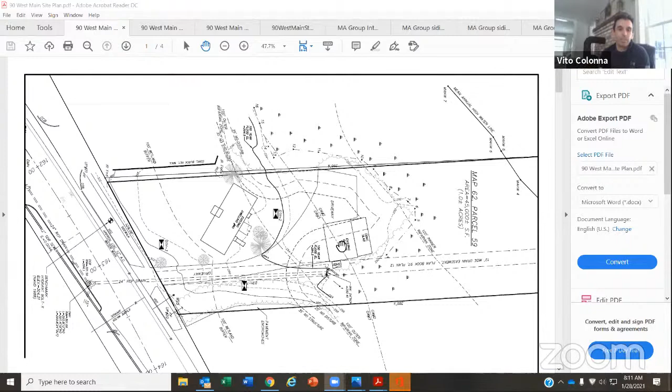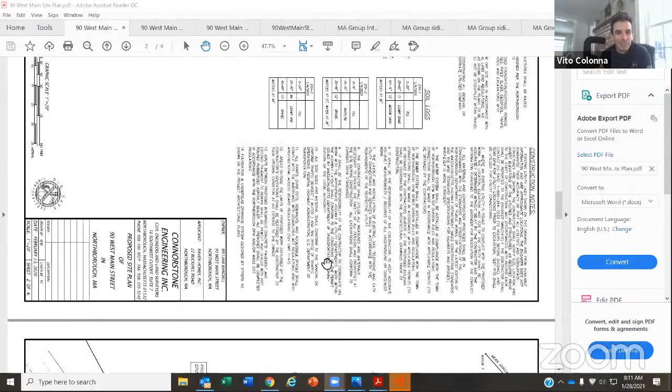So the proposed design, if we go to the next sheet, we're basically going to demo everything on site. Wrong building, there we go. Oh, that was actually the old one, if you remember that one, that was when we were here last time. Oh, Vito, I'm sorry, did you send me? Oh, you okay? I can, if I can jump on my computer here. Wait a minute, I can find it too.

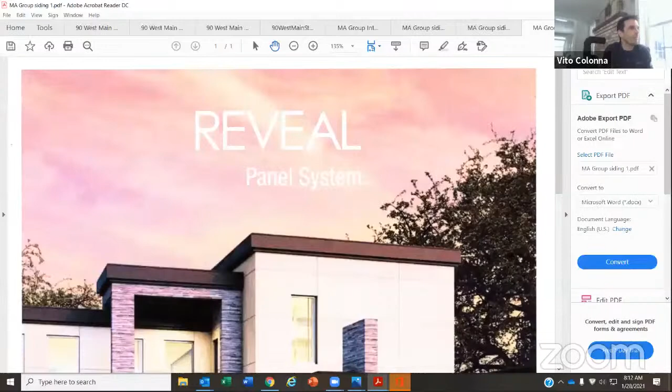Tom, I've got all the photographs, let me... okay, I got it. So I could just send them over. Nope, that's... oh God. I can email these. If I email them to you right now, will you get them? Yeah, okay. It's just taken a second. I found it, Vito. Oh okay. I just sent them over again, just in case.

Okay, so just bear with me, folks, while it's opening up. Oh yep, that's the email right there. Yeah, okay, so there you go. So you want... yeah, the next one. Just scroll down to the next page. That one? Yep, that one's fine too.

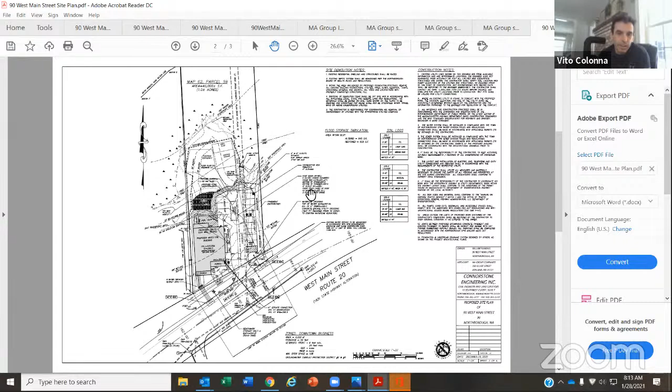You go up one. That's the landscape plan, but that pretty much shows the same information. So as you can see, we're proposing a building on the left side with parking on the right-hand side. We've got a commercial business use on that first floor and then residential above on the second floor.

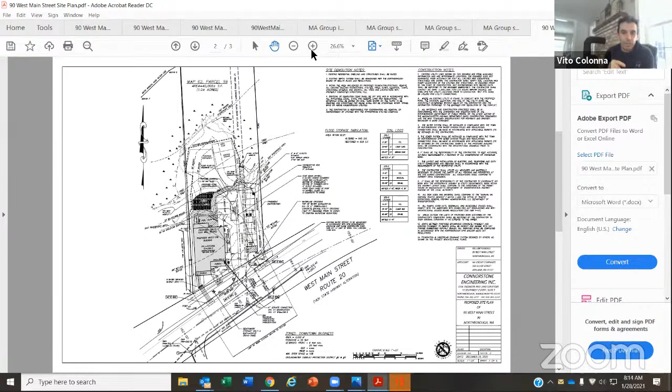Tom can go through the architecturals and the layout of the uses inside. But we've got parking on the side of the building, all the spaces are to the rear or to the side. There's nothing in front of the building. We've provided curb radii in the front to fit fire truck access into the site. We've also provided on the inside a turnaround area kind of right behind the building. It's a combination loading zone, turning area, and we've also put the dumpster pad back there, so smaller emergency vehicles and delivery vehicles have a place to turn around without backing out onto the street. I know that was kind of a concern last time.

And the building location itself, we're kind of limited on the site just because of the floodplain. There's a dark bold line on there that represents the floodplain, and it kind of cuts the site in half. So the building really has to come up to the front of the site. We're kind of limited on where we can locate that, which I think is good too, because I think the town prefers that close-to-the-street setting of the building. We're within that setback that's allowed, the minimum and maximum — we fall right in that zone. So no variances or anything needed for the building location.

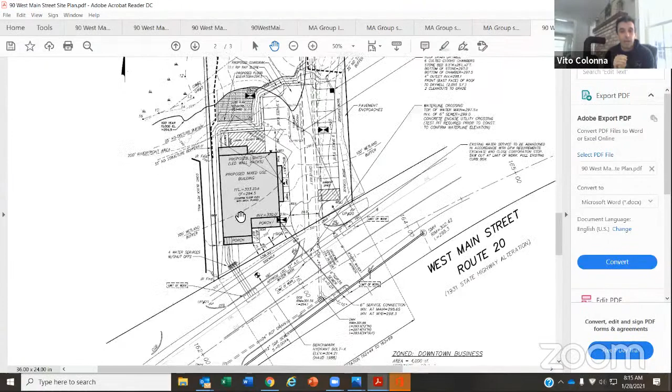I think that kind of sums up the site plan as far as design review of the location and what we have for spaces. All the spaces comply, we have the requisite amounts, and we were able to fit all those on there. We have our handicap spaces and access to the building. So it's pretty much a straightforward site plan itself.

I think you probably... and then here's the landscape plan. The applicants selected some landscaping, and we overlaid that onto our plans. Basically, they have some perimeter side buffer plantings — I think those are pine — on the front of the building. There's two porches and a sign up front, so there's some landscaping along the front of the porches and around that sign right near the front.

I think that's good from my end. I don't know if you want to have Tom go right into the architecture, or if you guys want to have questions on the site plan. Why don't we have any of the board members who have questions about what you just presented ask you, and then we can move forward to Tom. Okay, sounds good, does that work?

Okay, yep, so Dave, Lisa, and Diana, do you have any questions for this presentation that was just presented, this part of the presentation? Yep, I do. Okay. Can you hear me? Yep.

On the plans it says that there's going to be one bedroom and two bedrooms, but in the email it said two three-bedrooms. Is it a two-bedroom or a three-bedroom on that other apartment? I am not sure, Tom could probably weigh in on that. Well, I thought we were going to focus on the site plan right now. I'll deal with the building later.

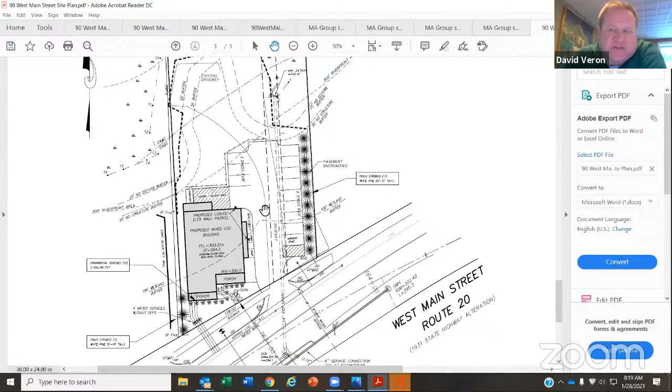My other additional landscaping comment would be, I'd like to see an actual legend on this, as well as, are they going to put beds around this, or are we just putting the plants in with no beds around it? What's your game plan on that?

I'm not sure, I would assume on the right-hand side that would be a bed, and then the front. So we can delineate the limits of the beds and stuff on the plans also.

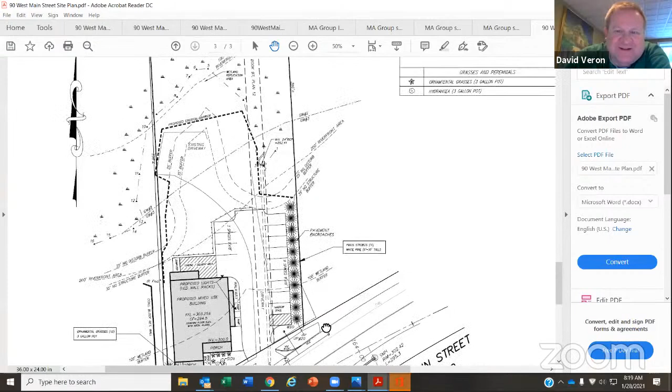Dave, there's a legend in the upper right-hand corner. It's not showing on screen, it's just cut off. It's in the email, if you want to look at the whole sheet. Yep, okay, I see that.

Yeah, so I'd definitely say just delineate the beds, what you're planning on doing in there. Okay.

I don't have any comments on the site plan, it's nice to see a site plan that has all the things we're always looking for, like the sign, the wall pack, and the dumpster location and that kind of thing. So it seems to me that it's in good shape.

I kind of tipped them off a little bit. Really? Okay, well, but they always do nice drawings too.

Do we have, so just as long as the applicant knows, I wanted to add that it's 8:20 and we have a hard stop at 9 in order to have a quorum for this meeting. So we'll move along the best we can, but just for the applicant to know how the meetings work, we typically have two or three meetings with design review. So this could be a session where you take a lot of feedback and then come and finalize your stuff for the next meeting. Okay.

So did anyone have any other comments left for the last presenter? And then we could move on to Tom next, who would move into the interior of the building.

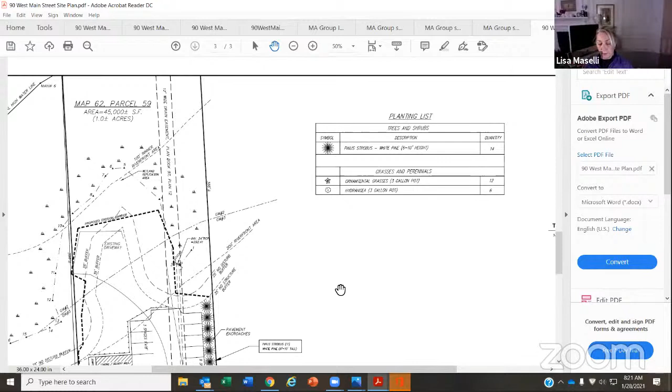Is there any way we can show a street view with the landscape elevation, with the building on both sides, showing how this actually sits between the other two buildings it sits between? I think there's a street view elevation of the building itself, but it doesn't include the two on the sides. I think it would be hard for us to start requiring people to show elevations of the other buildings. I don't think so, I think a street view with a camera from Google works pretty well.

We're in the technology world. I don't think that's asking too much. Well, it just depends on the view that you get.

Yeah, I know the building on the right-hand side, on the right screen side, that one's very close to the road also. Their parking area kind of shares our property line, and their building is very close to the property line, up to the right of way. So Vito, you had a prior site plan that showed the location of 96 and 82.

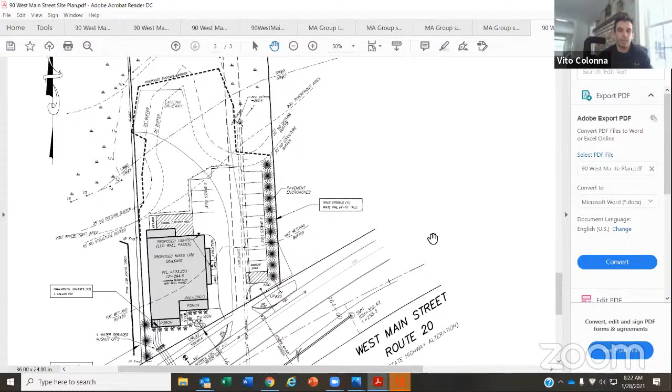Do you have access to that? Yeah, we can show the locations on the site plan itself, just so you get an idea of where those buildings lie. We do have those in our files.

All right, well, you can bring it the next time. It doesn't have to be right now.

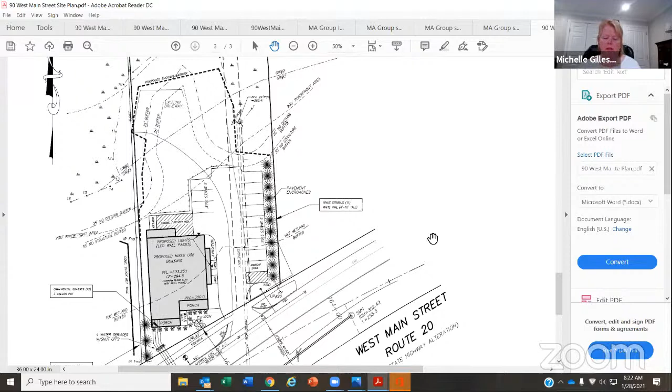You could leave the site plan on for a minute. So as we referred to, this is 90 West Main. To the left on the screen is 96, which is Renovo, a yellow cape looking building. To the right is Apex Dentistry, number 82. They're both within 10 feet of the property line, and they're both gabled to the road, so they're kind of a classical vernacular architecture.

That's one of the reasons the building we're proposing is also close to the street and also has some elements of that classical vernacular gable to the road. As Vito pointed out, because of the restrictions due to groundwater 2 and 3 and wetlands and all the buffers, we need to move the building forward. So it does conform in terms of setbacks, use, and building height. The allowable uses in downtown business includes vertical mixed use. We're going to have business on the first floor, which would be MA Group Construction Company, and the upper 2 floors are 3 apartments, 2 3-bedroom apartments and 1 2-bedroom apartment.

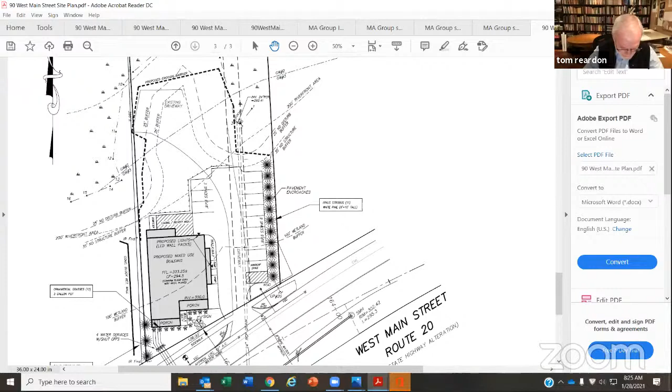So this color scheme is what we're proposing. We're going to use black or dark gray roof, black windows, white siding, columns, trim, etc. The architecture is based on a lot of the themes we see in Northborough, especially on Main Street, Summer, School Street, where we have this classical vernacular. It's residential in feel, but this building is mixed use, so we have some commercial detailing on the first floor in terms of the siding and window style, but it's meant to fit in with the predominant styles of Northborough.

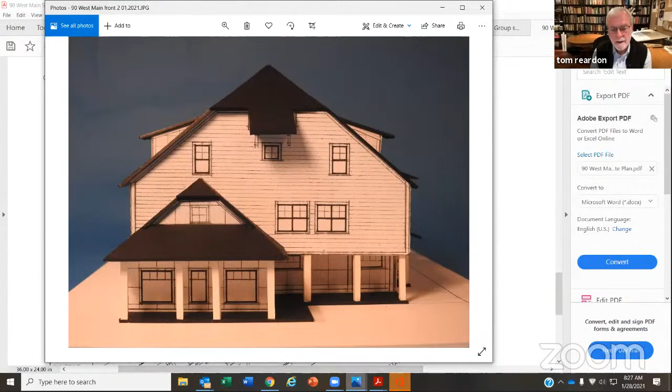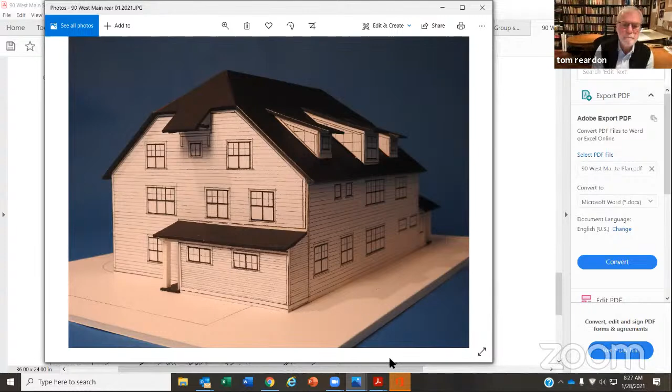So with that, I'm certainly open to answer any of your questions. If you want to go through, you can see the rest of the exterior views. Okay, that's straight on front. This is facing Main Street, and that's the west elevation facing 96 West Main. This is the rear, so that lower bump out is the access to the basement. And that's the east-facing elevation towards the parking lot.

So here you can see we're probably going to use 3 different kinds of siding. There is a product made by James Hardie, a cement board siding. The middle section is what they call the reveal panel system, and on either side there'd be lap siding or beveled, and possibly some what they call beaded cedar mill. I think I also included some cut sheets on the siding and the windows.

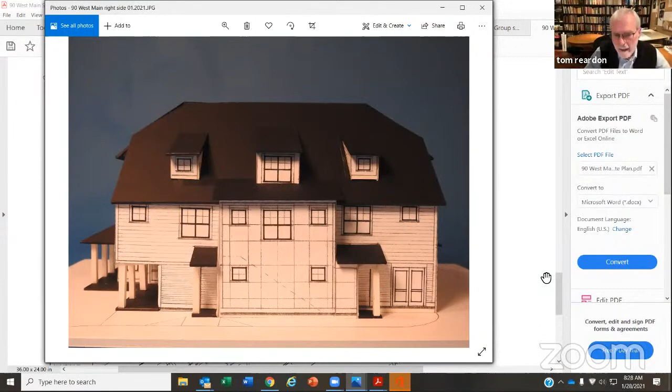So this is a Marvin Integrity, all fiberglass window in black. The fiberglass holds the color very well, not like a painted vinyl, which will fade. The double hung - we're showing a 4/1 pattern, which is common to this classical vernacular.

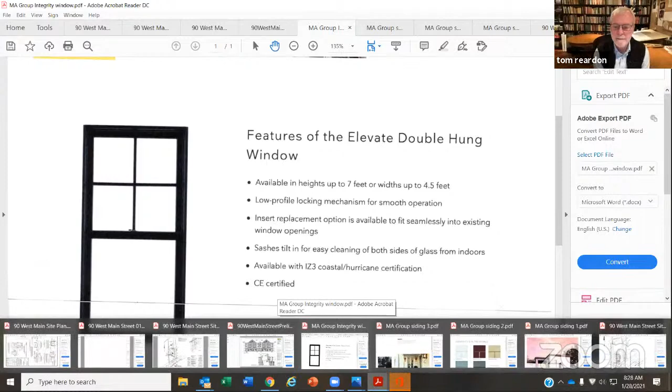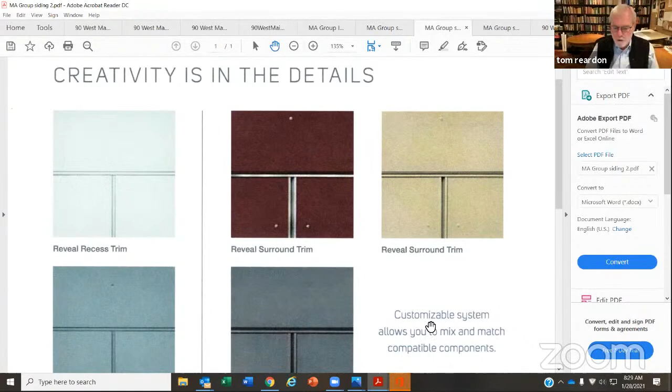So this is a cement board siding, composite siding by Hardie. That comes in various widths - we'll probably use 4-inch exposure in some areas and an 8-inch exposure. And if we go to the reveal, it's like a smooth flush panel. This allows us to distinguish some of the more commercial portions of the building, and also lets us make the building more of a contemporary interpretation of traditional architecture.

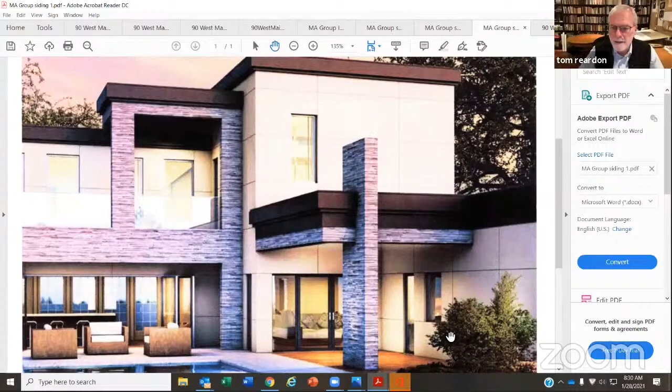And all the siding we're proposing would be in white. Now, are you flexible on the all white? Could you go into a light gray or something that's just a little bit less contrasty? No, the contrast is one of the things we want to emphasize, to make it distinguish and stand out along Main Street. A lot of the Main Street buildings are yellows and creams and tans, and we wanted to make sure that they had the visibility for their business, which are their contractors. So we strongly like to stick with the high contrast. Like if you go to a town like South Natick, where all the buildings are white with black shutters and black windows, I think it's a very attractive traditional look.

So I first have to say, it's refreshing to see a building that doesn't have a lot of vinyl on the outside. I like the material selection a lot. No vinyl, no shutters. I appreciate that from a sustainability point of view.

I think the scale, the way you have this sort of smaller scale entry towards the street, makes a lot of sense. And I think also the way that scale is used on the various types of siding is very effective.

Let's look at the pictures for a second. I don't have any issues with the elevation. I think the roof is really elegant. We don't see a lot of roofs that have any detailing like this. So I really don't have any objections.

I think black and white makes a lot of sense. Particularly with the black window frames and mullions, I think the white is a good solution.

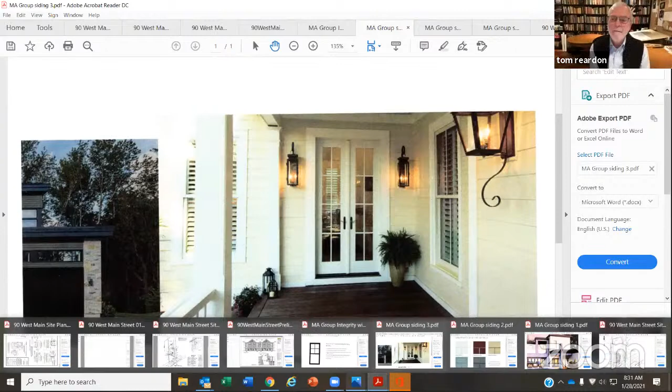Can you tell us a little bit more? Are the columns just square and the same profile all the way up, correct? Right, I was looking to make the support beams and the columns probably the same thickness, so it would read as one system. That, coupled with the flat panel, gives me an opportunity to lend a more contemporary feel to this classical language.

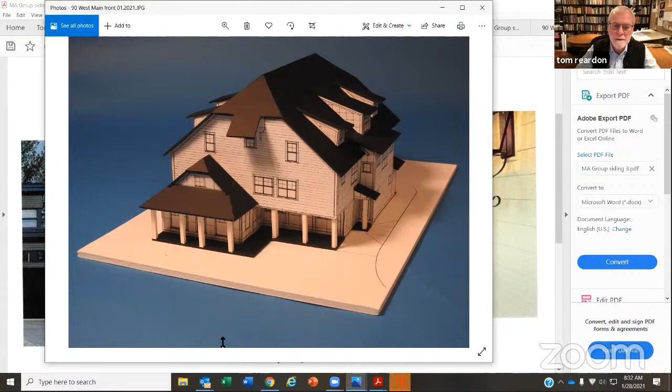So the farmhouse look, or the I-house look, was based on the Greek temple, Greek revival look, but it was kind of the poor man's version. This is my contribution to that tradition, but also using some classical details. I'm not trying to replicate a historic style, but I'm trying to work within the historic styles that are prevalent in Northborough. I think it's an accurate interpretation.

Nice design, Tom. It really looks good. Thank you. Any feedback from Dave? I think it looks great.

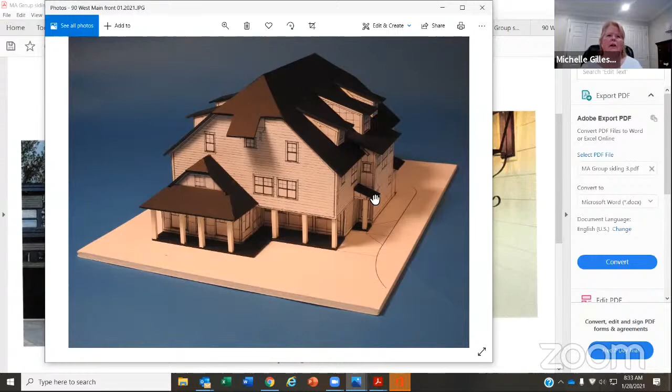If anybody wants to see the Google Street View, I have it up. Let's just take that off. I'll stop sharing. Okay, Diane. Oops, that didn't work. Hang on. Can you see that now? No, Kathy, I may have to... oh, there we go. Is that working? Okay, so this is the site.

And then you can see the yellow over there, that's the dental facility that Tom referenced. And again you have yellow over there. So I think the colonnade is kind of a nice nod to that, Tom, as well. I have to take credit for that building as well, so. Oh, well, there you go.

The question about the commercial building underneath, is it just going to be a showroom, or what are they actually going to do there? Well, they're a construction company and they have their offices. They will have a showroom for displaying kitchens, bathrooms, etc. Do they have storage in the back for their materials, or is it just going to be a showroom? Mostly showroom on the main floor. They might have some material stored in the basement. They're not storing any materials on the exterior.

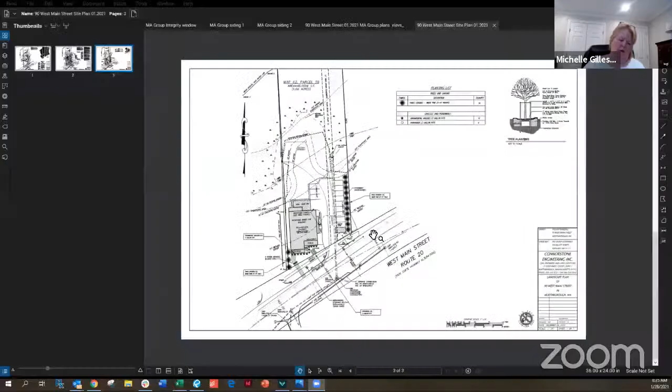After you do that, you're going to address how many bedrooms it is, because one of the members asked, was it 2, 3, 1 bedroom? Yeah, 2 three-bedroom apartments and 1 two-bedroom apartment. Okay, so that's different than what's on the sheet. Well, I don't know what sheet you have, but that's what would be proposed. Okay, yeah, we could update that. That was for the parking count, so we'll just update our site plan.

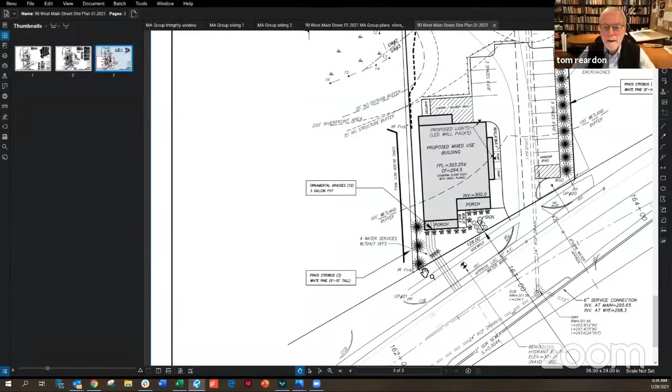So if we look at this lower left corner where the retaining wall is, you see three pines. Now there's a parallel line, one that goes through the three pines, and then about 5 feet to the left of that is another line. See that little wedge of property? Yes, right there. We don't know who owns that.

Talking with Vito, he says we cannot fill that because we don't own that property. I've talked to the owner of 96, Tony Abu. We would prefer to be able to infill so we don't have this gully between sites. Tony Abu has accepted our proposal to infill to level out the front of the sites. However, we have this obstacle with an unknown owner of a non-usable piece of property we cannot touch.

So I've talked to Kathy and Julie, the town assessor. We might have to do some research to see if we can find out if there is any known owner, and how we can resolve this issue of this little vestige, probably a drafting error from decades ago. But there it is - our preference would be to fill that.

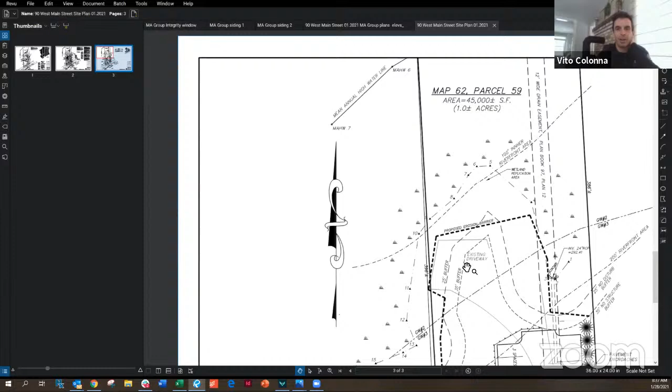How far back does it go? Does it just go between both? It disappears, it goes to nothing. Yeah, it's just a long triangular sliver, kind of a remnant piece. It happens - you need a title search to figure out who has rights to it. It could be no one anymore, you could be able to claim it, but as of right now, more research would have to be done.

So if we can resolve that, our intention would be to infill, so you don't have a retaining wall, and then it drops down and then goes back up again, which is less than ideal.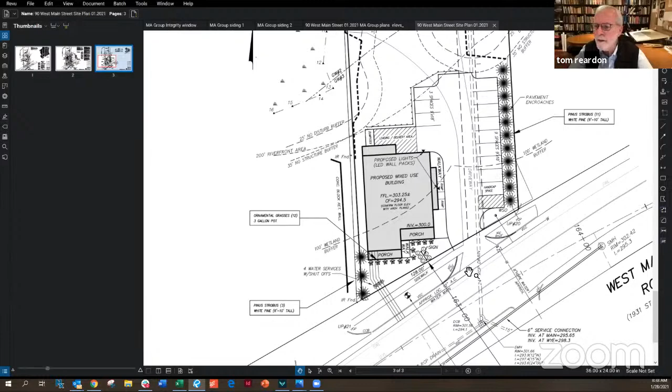And is the building itself a little bit below grade? So is the land going to be raised in that area, or are you just going to terrace it? Yes, we're going to bring the grade up to 303, which is approximate to a little bit higher than the roadway. We're basically going to fill it up to the roadway elevation, so when you come in the driveway, it's essentially going to be flat and then have a slight downhill after - so essentially at road grade.

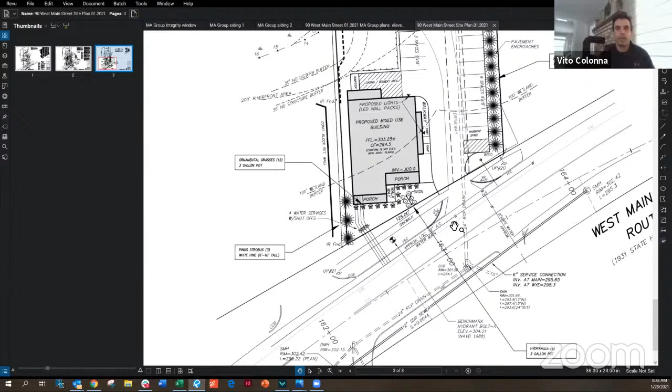We're going to fill that whole front piece in, and it'll go through the parking lot to the back. The back corner of the parking lot will only be maybe a foot or two below road grade, maybe 2 feet even in the very back corner. So we're kind of making a pad right off the road. Do we have the grades here? Yeah, so you can see in the back off the edge of the parking area, there's those contour lines - it kind of comes in, and then off the back edge it's going to drop down.

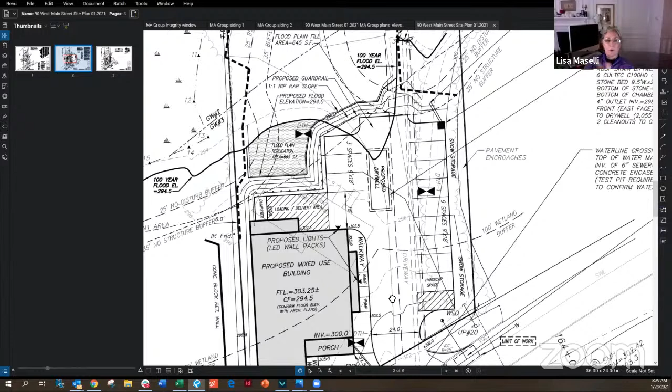All right, and that'll just be grass terraced - you don't have to worry about building any retention or anything there. No, we didn't have any walls proposed, it's all just grass slopes. And then we've also had a little area ramped down so you can access the back with a lawnmower or whatever you need to get down there.

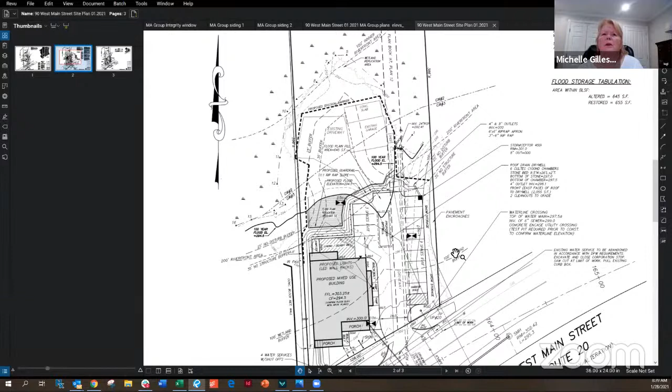I think that grass area in the back is appropriate because you have mixed use - you have apartments, you have people living there, they're going to be outside, and rather than just pavement, you got to provide some area for them to sit and be outside. And when you're back there in that low area, it's actually really quiet and nice - the elevation blocks the road, it's pretty nice back there.

And when you see back there where it says existing garage, are you going to put a new garage back there? No, that would just get cleaned up - so that whole back area won't have a garage on the property. So if there's no garage and you want to do maintenance, I would think you'd at least want to consider something oversized, like a shed, so you could put lawn mowers or things like that - I'm sure you don't want those inside the building.

Something for consideration - I think I would agree to something like a nice shed in the back. They're going to bring a contractor to do that work - most likely you'd have a landscape contractor come in and mow it, but we can ask them if they'd want a small storage shed or something like that in the back. I think sometimes in these mixed use buildings, it's nice to put a shed where storage is going to be for your tenants, or they could put bicycles out there - it's a nice amenity to offer.

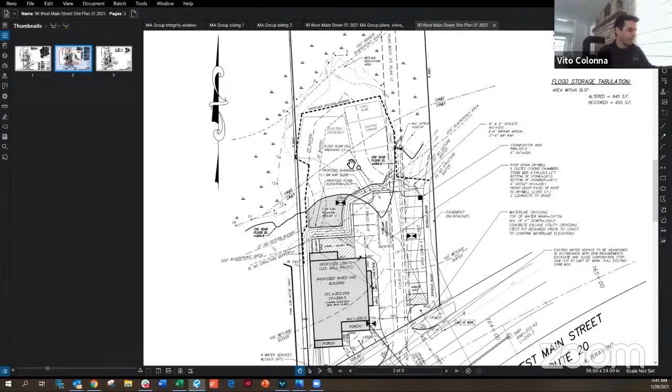And it's a shed. Okay, it's not something we have to be concerned about. It's a shed. They do have a full unfinished basement too, right?

Yeah, a lot of times in these mixed use buildings, there's 2,800 square feet in the basement. Tom, were they planning on breaking off to make little storage areas in the basement for the tenants? We have not discussed that. Primary use was to have mechanical, a sprinkler room. Yeah, the building has to have sprinklers.

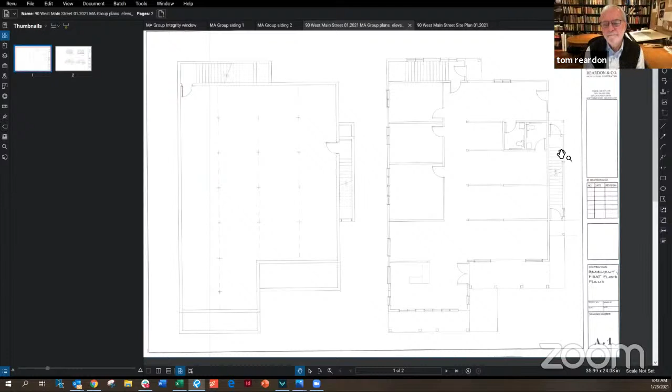Okay, looks good. All right, so...

Dave, do you have any feedback, because we're coming up to almost 8:45, we have a hard stop at 9, so let's give some feedback to the applicant for their next meeting. Dave, thinking about the left side corner of the building where they talked about that strip of land they have to figure out, do you have any feedback you can give them now to go work on their landscape there?

When you're talking left side, we're talking the void? Yeah, with the 3 trees in the front. Instead of doing the 3 trees, are you recommending to do evergreens? Well, they have evergreens in there now. Okay, I think that's fine. I mean, they have the wall right there, so it's kind of hiding the wall. So I think that's fine.

Do you have any other feedback on landscape for them? No, I think it's pretty good. It was just, if they're gonna do a bed in there, just show a bed, and that was pretty much it. Like mulch, just draw the line in and call it a day.

Okay, and you're okay with their plant materials? Yeah, it's a tight area. If they want to do something other than white pines, to Lisa's suggestion, that's fine. It doesn't really matter, it's a tight area there, so it's really up to what they want to do. The pines will get large there. It depends what type of pine they pick, but it's personal preference on what they want to do there long term, because it can have problems whether it be an arborvitae, a pine, or even a hemlock.

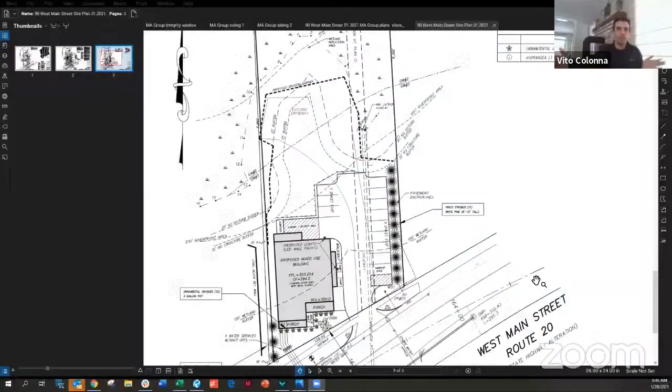Okay, so could I ask the question? Dave, if there's snow storage along this edge between the 2 properties, maybe just have some planting near the street and at the far edge? Yeah, I don't know how many trees are compatible with snow storage. That's kind of what I was thinking to ask, is if we clustered them up near the front and left the back as a buffer, as a plowing area, because it's about a 10-foot strip in between.

You could do that, or go with maybe some deciduous and then go with some grasses in there. Because the other thing is, like, if I was plowing it, I would go for a straight down shot right towards the grass area, right down.

That's where I would be pushing the snow, because you can have cars parked right there during the snowstorm. Yeah, and that's where I'm pushing.

I would probably prefer to see some deciduous trees in there with grasses, so in the winter the grasses wouldn't be there and you can push over those. That may be a better situation than evergreens, because evergreens are going to be an issue if you're trying to screen there. It's an easier situation for snow, since the cars are gone during the day and you can push in there, over where grasses like miscanthus were, which in the winter wouldn't be a factor. That would be a good solution.

So the property on the right, the paved area goes right up to the property line. It actually currently goes over onto this site, so it would be nice to get some relief between the two paved areas.

When I was looking at it, it felt like there were too many trees. When they mature, I don't want them growing into each other and killing each other. So do you need that many trees? Yeah, you can definitely lighten the load. Whatever goes in there is going to need a lot of maintenance.

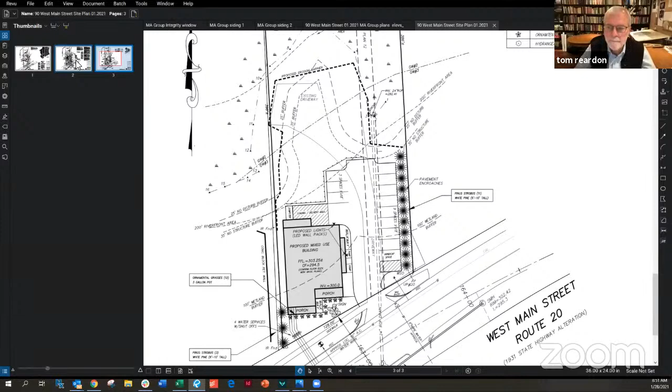On the two front porches along West Main Street, we'll probably have recessed lighting in the ceiling, so it would shine down, not out. We also have a couple of wall packs on the building directed to illuminate the entries and the parking lot. No poles are proposed. We need a photometric plan showing the light isn't leaving the perimeter of the building, but with the modest amount of lighting we're proposing, I don't think it'll be an issue. I just wanted to bring that up to see if you had any comments.

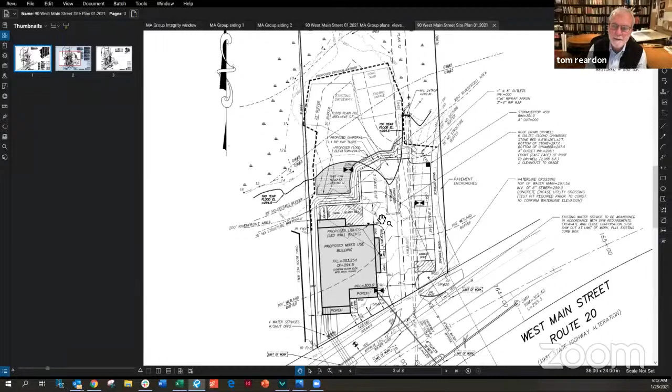I think the recessed lighting on the porch is an attractive look. It was done on the Brigham Street development, and there's another property on Main Street that uses it as well. I like it a lot.

Does anyone else have feedback on the lighting? They're going to do a photometrics plan anyway for the planning board, but they might as well get your feedback now so they can address it. I think that should go before the appropriate board. The ZBA? Oh, the ZBA, okay.

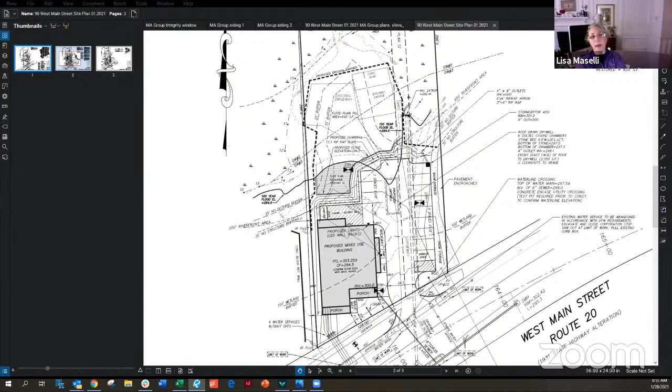My only other question is if we could put a couple of trees in the back of that grassy area, just to break it up between that and the water behind. It would provide some shade, and people are going to want some shade, not just grass.

Is anyone going to see them? Yeah, the people who live there. The wetland itself is like a wooded swamp, so there's a bunch of mature trees back there. On the left-hand side, behind that retaining wall, that whole section is pretty wooded back there.

Vito, is the ground wet back there? Is it spongy? It's not, really—it might be in the spring. We weren't there in springtime, and it was pretty dry. Can you go right down to the brook? Groundwater was about a foot below the ground.

So it should be good along the perimeter edges as you get closer to the wetland. In the spring it probably gets a little spongy, but in the center portion it should be pretty dry. I do know at Tony's property next door, the grass area in the back gets incredibly wet—it dries up in summer, but the rest gets soaking wet usually in spring and fall.

That area has to be lower than Tony's, so I'd assume it usually gets pretty wet too. Mowing in the spring might rip up a little grass, but root systems help pull some of that water out. It's part of the whole swamp, the wetlands back there—it's soaking wet. We used to maintain the property next door; it's always wet because it's a whole wetlands area back there. It's unbelievable how the woodlands come in from there and surround it pretty well.

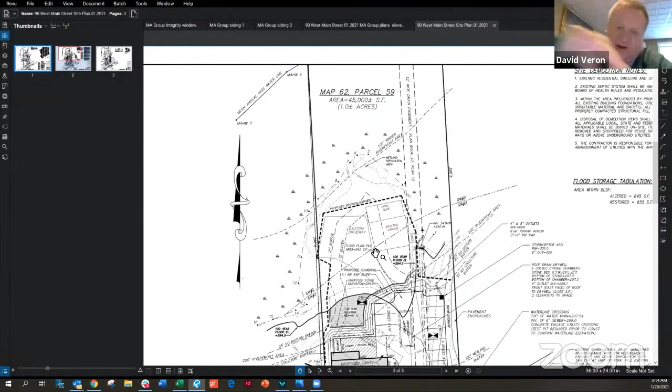And if I recall, there's a wetlands area you have to replicate part of with planting back there—a little nook at the top that needs to be planted up. I think they've already done the planting actually; it just has to take now, for the next couple of years of monitoring.

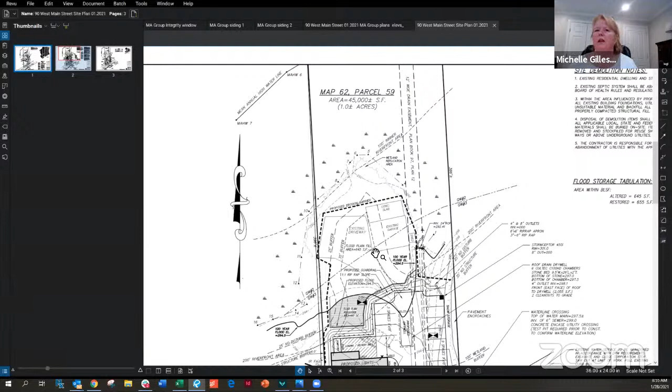Okay guys, I need to wrap up the landscaping because we're really running out of time here. I think you've got enough information and feedback now—you can come back and present, and see what the board's feedback is.

So a couple of things: we asked about lighting. Does anyone have any other additional feedback on lighting so we can bring it to the applicant for their consideration? Or is everyone agreeable that the current lighting looks good?

Current lighting looks adequate, appropriate. Dave? I think it'll be good. Okay, and Lisa, any issues with the lighting?

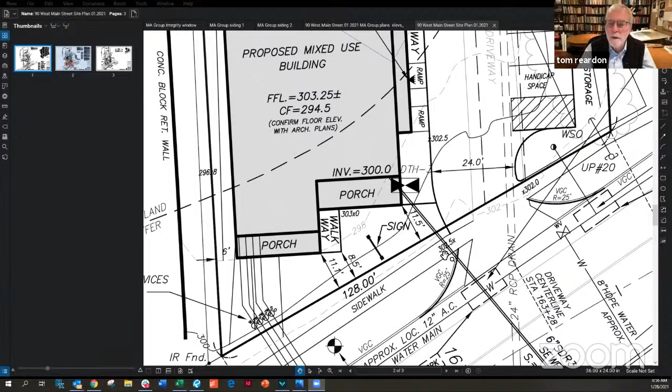Okay, perfect. So we've addressed the signage, we've addressed the lighting, we've addressed the landscaping, we've addressed the site plan. Does anyone else have any other questions that we can provide feedback to the applicants for the next meeting?

Michelle, I just want to know when your next meeting is, because right now you have a meeting February 18th, and I just want to grab Diana before she has to leave. You have a meeting that's just been set up for February 18th, but that's just with Judy, and you're going to need the whole hour and a half with Judy. There's also another applicant that wants to come in and meet with you on some preliminary designs at 1 Lyman Street.

Okay, so if you want to look at something the week of the 8th, maybe. Does the applicant feel like they could get this feedback and be ready to go if we had something the week of the 8th, February 8th? And then we also want to ask, is everybody available the week of the 8th? Primarily looking at maybe the 11th or the 12th, if you could look at your calendars now.

Do you want to do another morning meeting, Michelle? It's really up to everyone's schedule. Can you look at an evening and a morning schedule? On Thursday, I can do either morning or evening, and I can do Friday morning. You're talking the 11th, Thursday? Yes. Okay, for 90 West Main to come back, and then also 1 Lyman to come in.